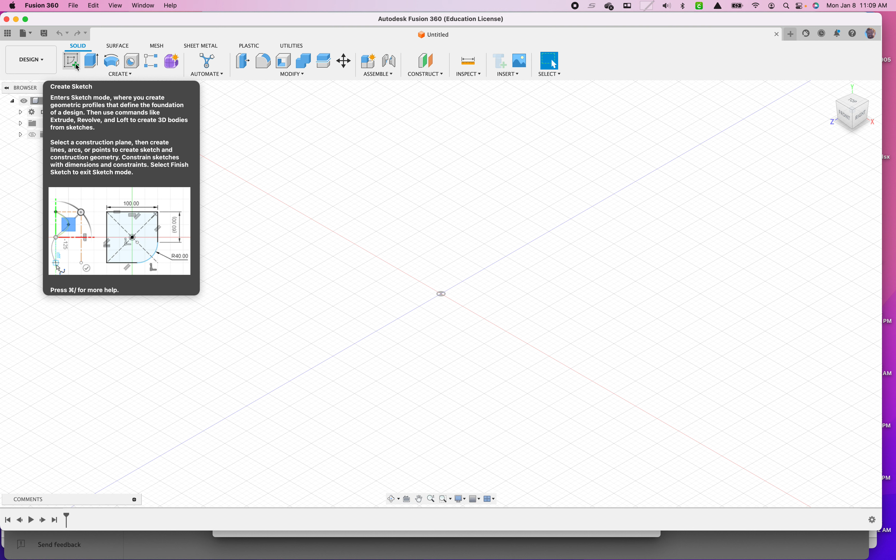This is a more advanced version of the stool design, for those ready for some new features and who've already had an introduction to Fusion 360. I'm going to design that same stool, but exactly how I should have done it for the stool we did in our shop.

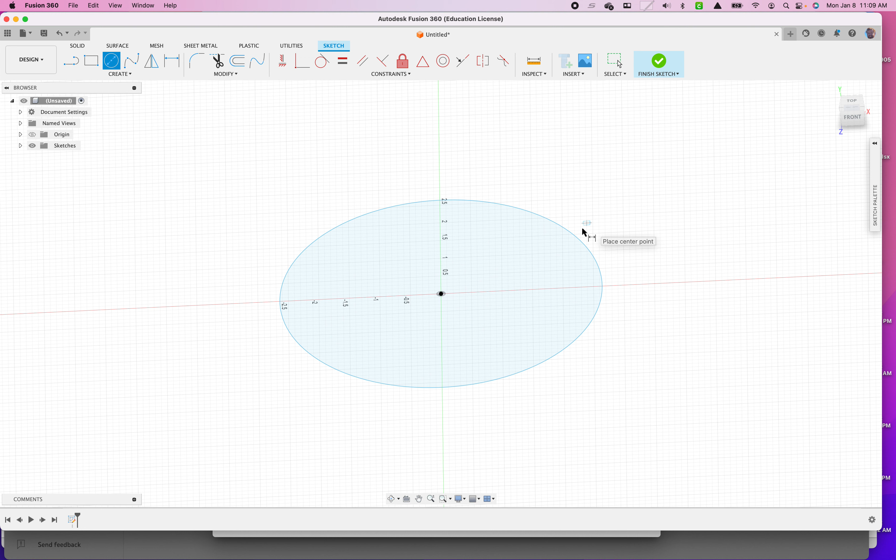I'm going to start by creating a sketch on a plane. I'll do the circle first, the seat, which gets everything oriented around the origin. I'll go D for dimension and make that circle 12 inches. Then we'll extrude it to a thickness of 0.75. All right, we've got our seat.

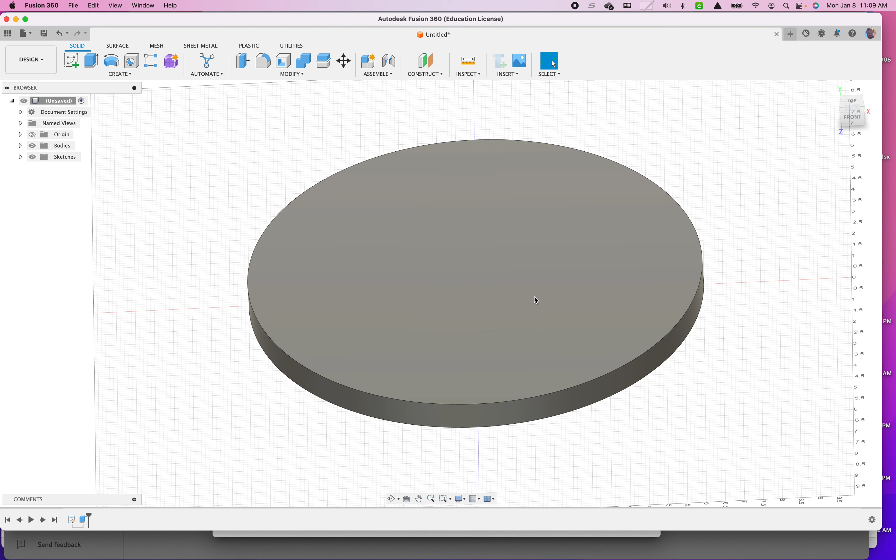Now I'm going to design our legs, starting a sketch on a vertical plane. Once in this plane, we don't have all the geometry in the right spot, so I'll include it by going to P for Project Include, click on this object, then click OK. That gives me a rectangle representing that shape. Project Include is often something you need to start with when designing from a sketch incorporating previous geometry.

Even if I were to turn off the seat, which I should label, and turn that off with the eyeball, I would still have that rectangle.

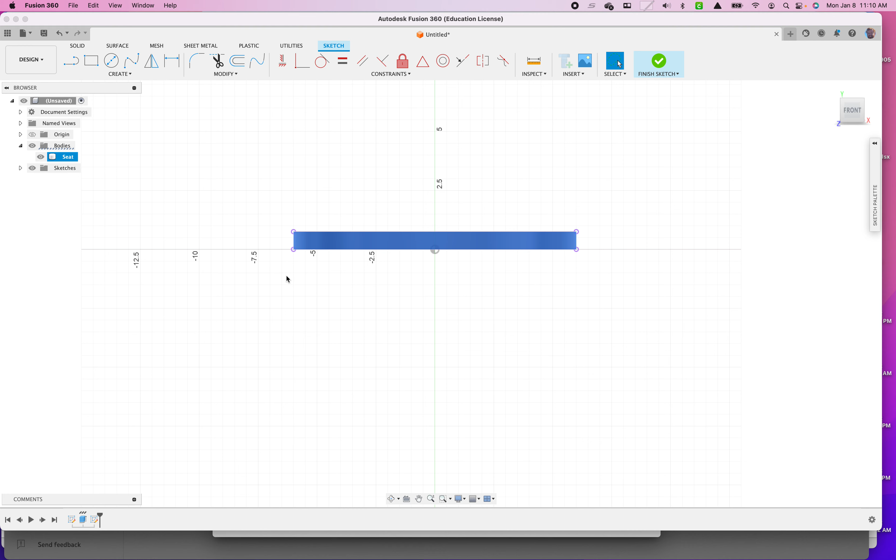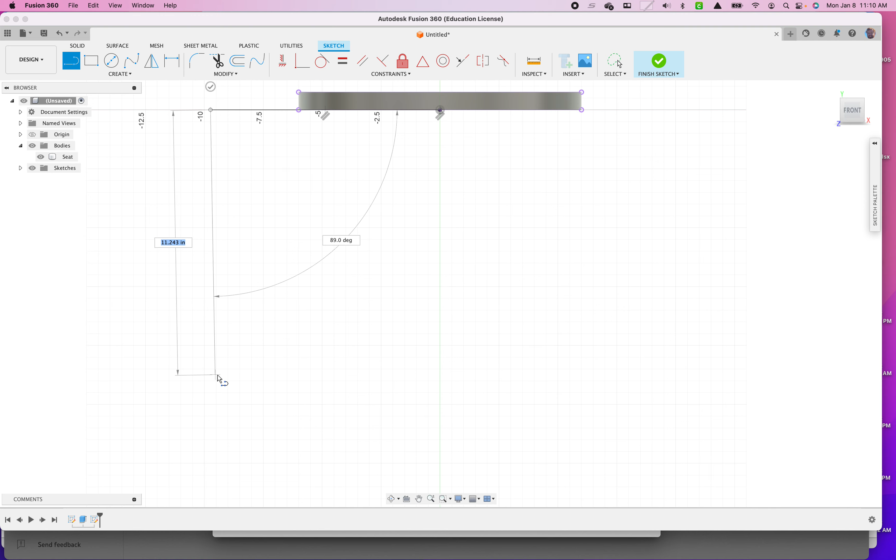Now I'm going to draw my leg structure. I'll go L for line, start from the origin, go out beyond where I need to go, then go down, straight down, doesn't matter where, then go over and up at an angle, and then flat.

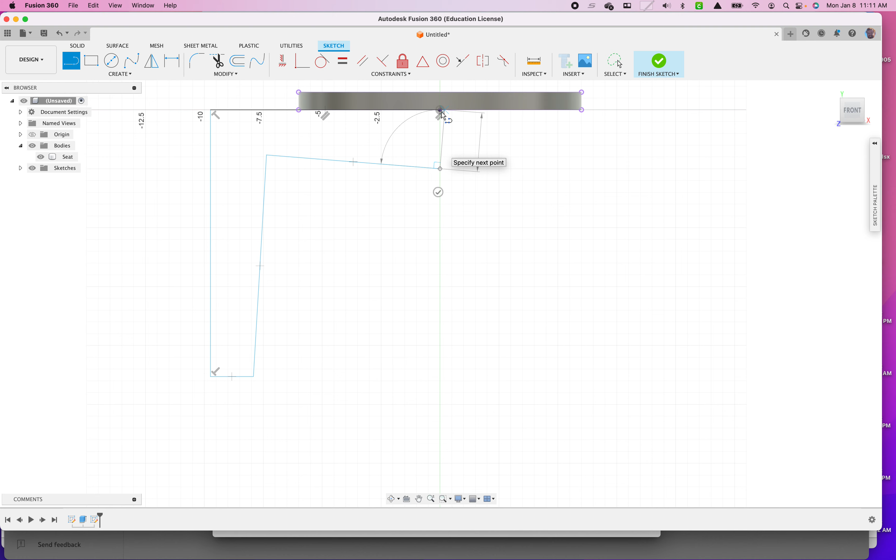I'm going to deliberately mess some stuff up so we can show some connections here, or some constraints. So I want to make this one horizontal vertical. I'll click on my horizontal vertical command and click on that line.

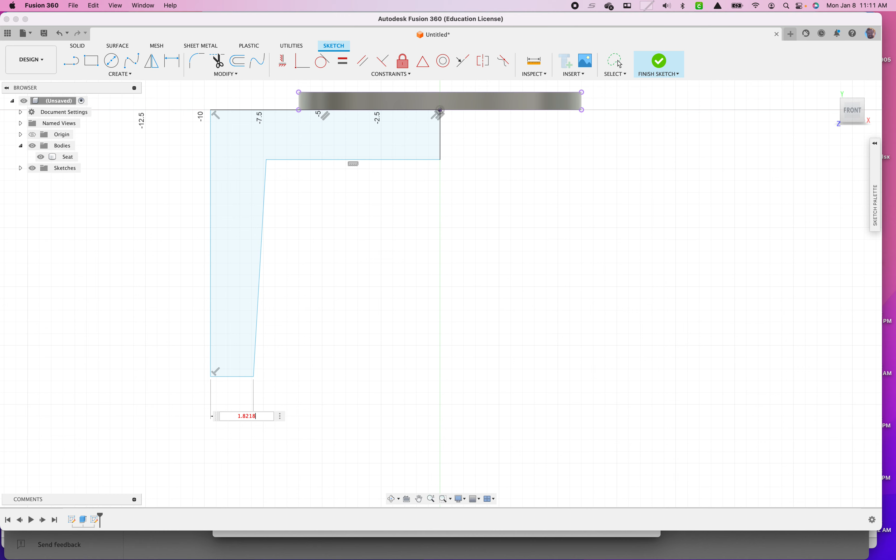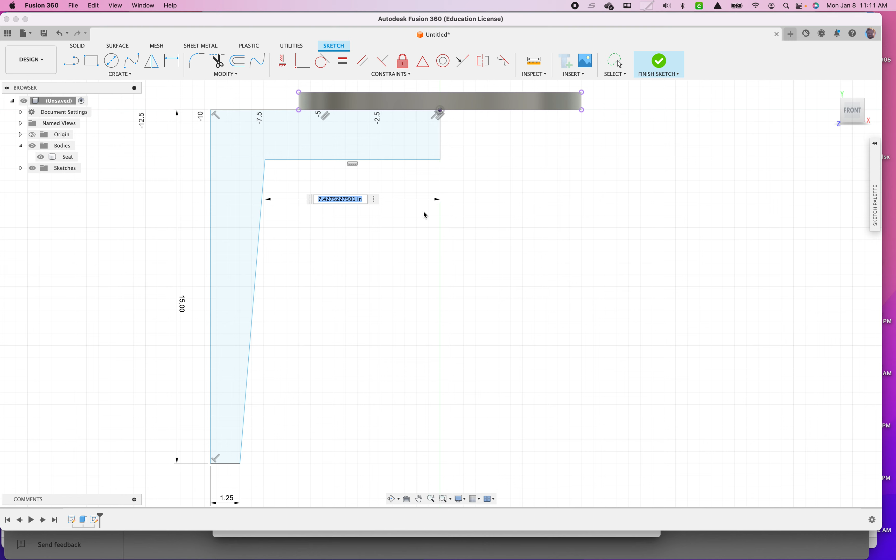Then I'm going to make this dimension here be 1.25, as I decided to do in our design. And then I'm going to make this line be 15 inches over here. Then I'll make this line just as big as my radius plus a little bit, so I'm going to go 6.25 to go just barely beyond the edge of the stool.

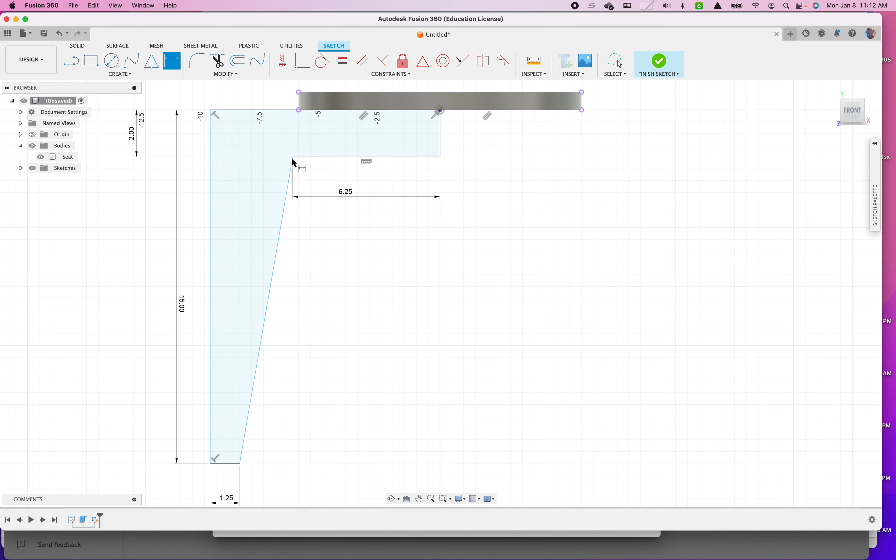And then I'm going to do this dimension here. Click, D for dimension, click, click, click, and that should be 2 inches. And then this dimension here, click, click, click, 2 inches as well.

All right, we have a line right here where we made our connection, so I'm going to make this miter cut in this piece as well. I think that's all the geometry I should add in here.

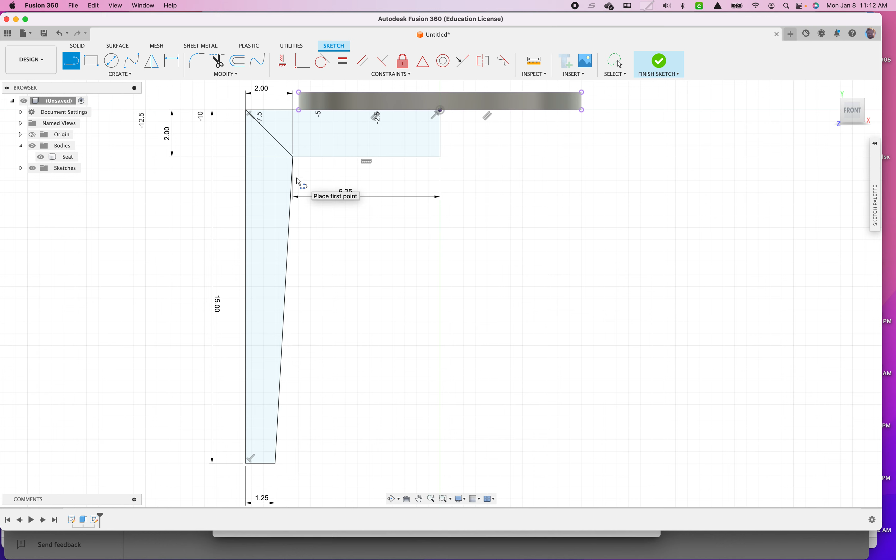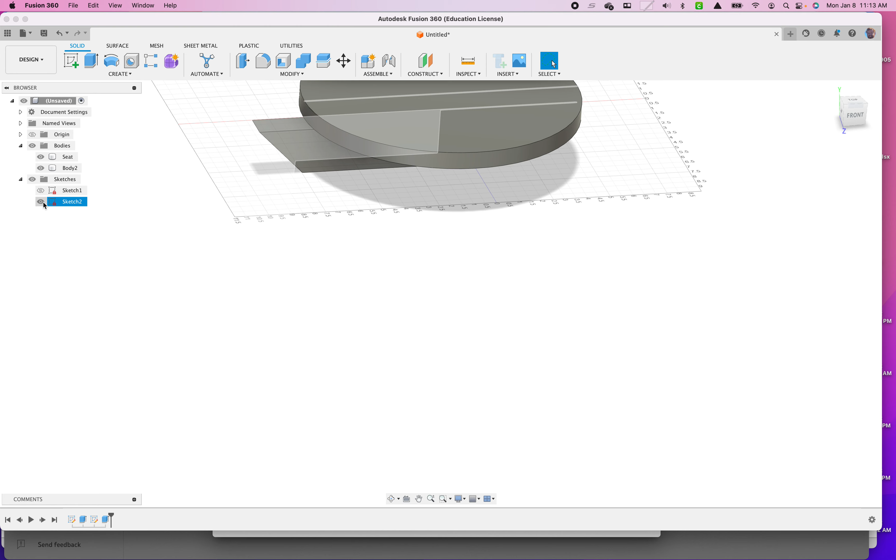Now I'm going to go E for extrude and extrude these at separate times. I'll do this one first, 1.25, not a join but a new body, OK. If I orbit a little bit, you can see my sketch turned off, so I'll go back and turn it on again. Then E for extrude, this one, 1.25, and not join, but new body as well. All right, now we've got that shape.

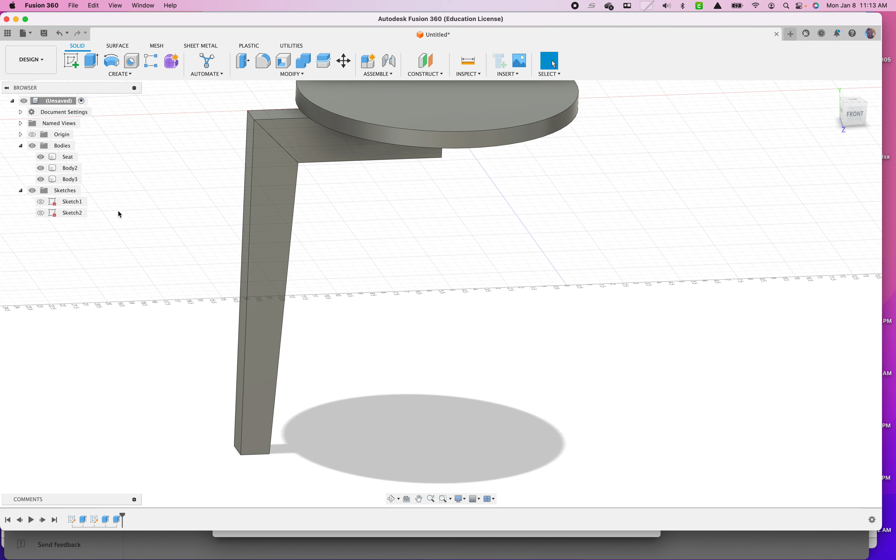I'm going to turn off that sketch now, we don't need that anymore. Next, I'm going to fix this corner up here, so I'll start a sketch on this surface right here. It doesn't really matter what you do—yeah, it should be on this surface right here. And then I'm going to turn off my seat.

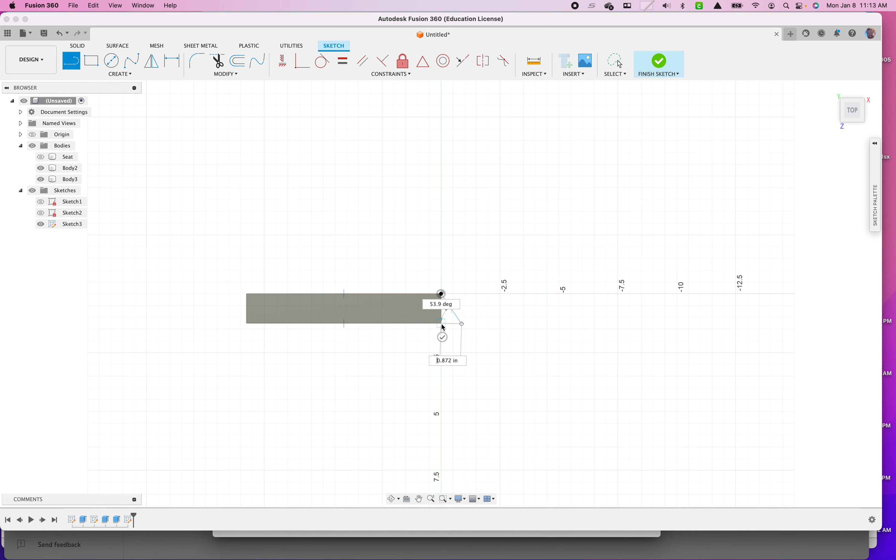This allows me to draw the angle that we're going to do when we copy this around. I might get this wrong, but we'll try the first time. L for line, and I'll draw from the origin out at a slight angle, then over to this point right here. Now I have this triangle here. I want to make sure this little line right here is horizontal vertical, and that this angle here—D for dimension, click, click.

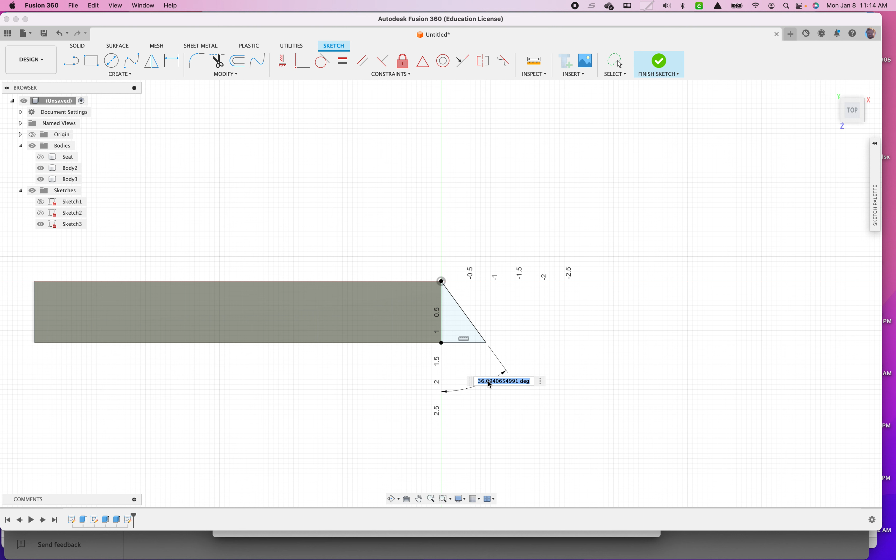This here should be 30 degrees, like so. Now I'm going to go E for extrude. I'm going to click on this guy right here, and make it... let's click on our home button again to get to a good view. I'm going to go down -2 and connect that.

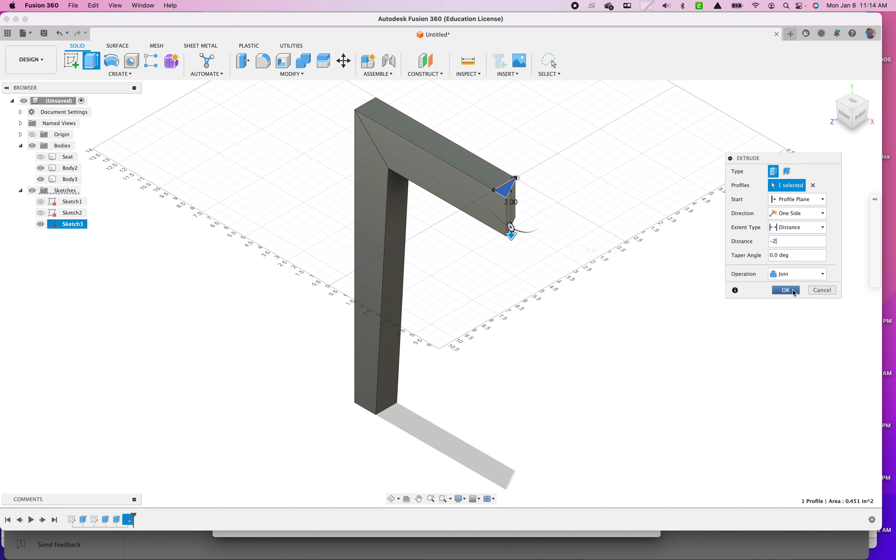Is it working? -2, and we'll do a join command, as long as it doesn't join to the seat as well, which is off right now, so it should work. So when I turn the seat back on, I have a seat up there, and I have my parts.

Now I'm going to add some of the actual joinery into this. So we cut a groove, and we put in an extra little piece here, and this is going to be helpful to put right in the middle. So I'm going to go to construct down here.

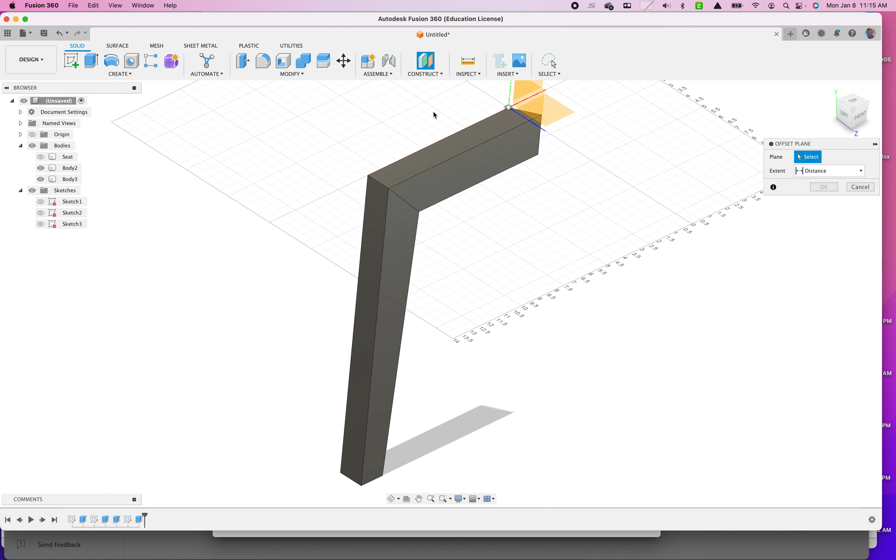The construct drop down, and do a midplane. A midplane allows me to draw between two sides of something. So I'm going to click here and orbit to the other side and click here. And now I have a plane right in the middle of those.

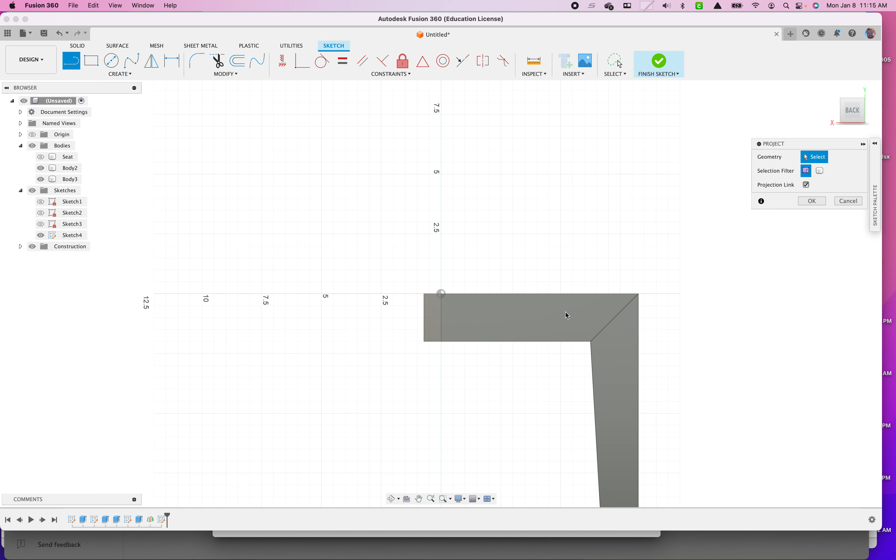Click OK. I'm going to start a sketch on that plane in the middle of my leg, and draw a triangle that represents that curve. First, I need to project include, that's create, project include, project, or shortcut P, this geometry. So I'm going to include this shape and this shape.

Now I'm going to click OK. And I'm going to do L for line, to draw from this point up here to this point down here. And this line should be equal distances on both sides. So I'm going to do a 45 degree by clicking on this and this.

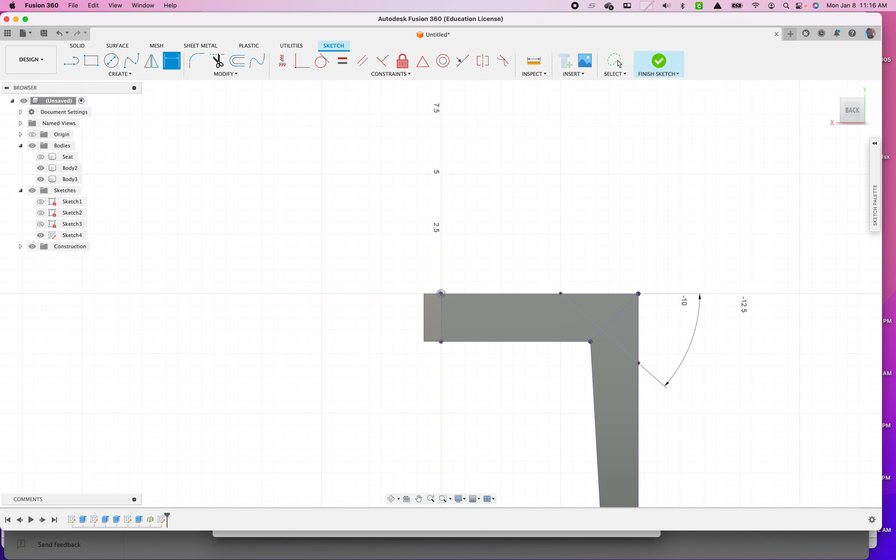Is that going to work? Yeah, this should be at 45 degrees. And then the depth of this cut, I remember, was 2¼ inches. So I'm going to click, click, click, and let's go 2.25. And enter. All right, now I'm going to create this spline in the curve by clicking Finish Sketch.

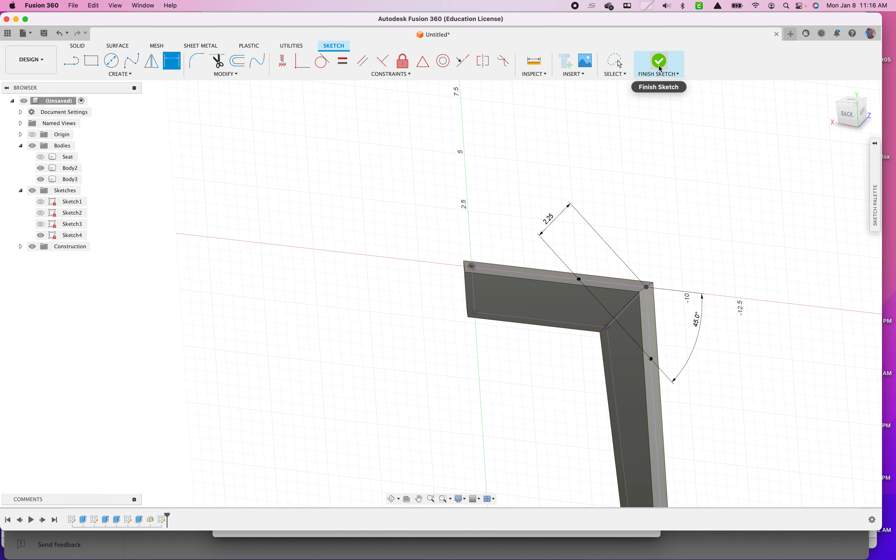I'm going to label my frame and my leg, so I know what I'm cutting, and I'm going to turn them off for a second.

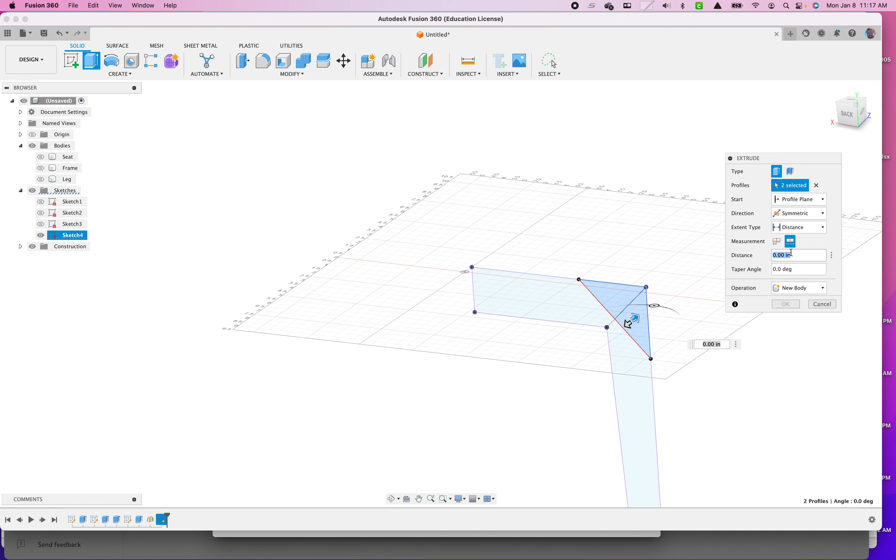And I'm going to go E for extrude, or create extrude, and click on this and this, and do a symmetric, two sides symmetric, that's just called symmetric extrusion, where the full dimension of the thing, not the half dimension, is 0.5. And I'm going to say that's a new body.

Now I'm going to turn on my leg, frame, and seat again, and I'm going to cut the hole now, because if I turn off my spline, which I should label over here, there's no hole that it's inhabiting right now. It's just part of the leg.

So I'm going to go to modify, combine, and do what's called a Boolean, where you combine things or add them together or subtract things. And I'm going to cut

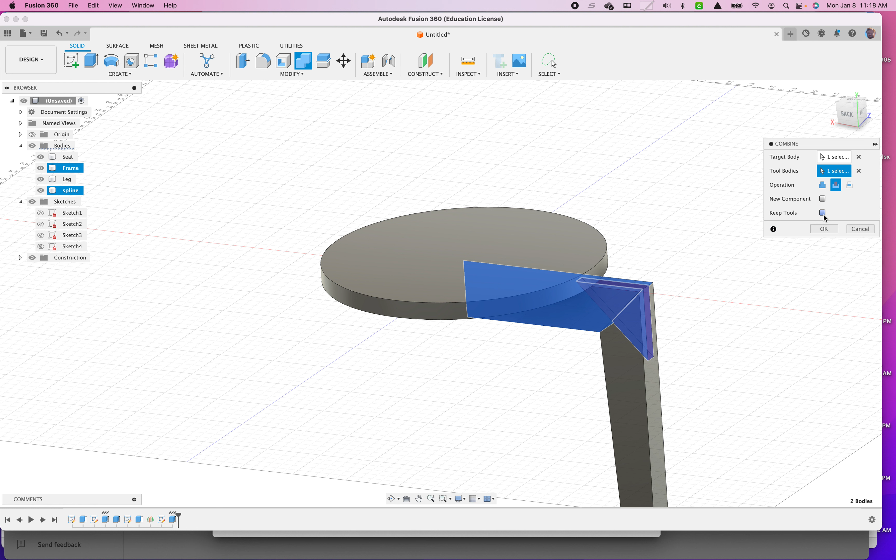this body using my spline as a tool, and you can select it over in your thing so you don't have to struggle with clicking on the right thing. And I want to keep the tool. I don't want the spline to disappear.

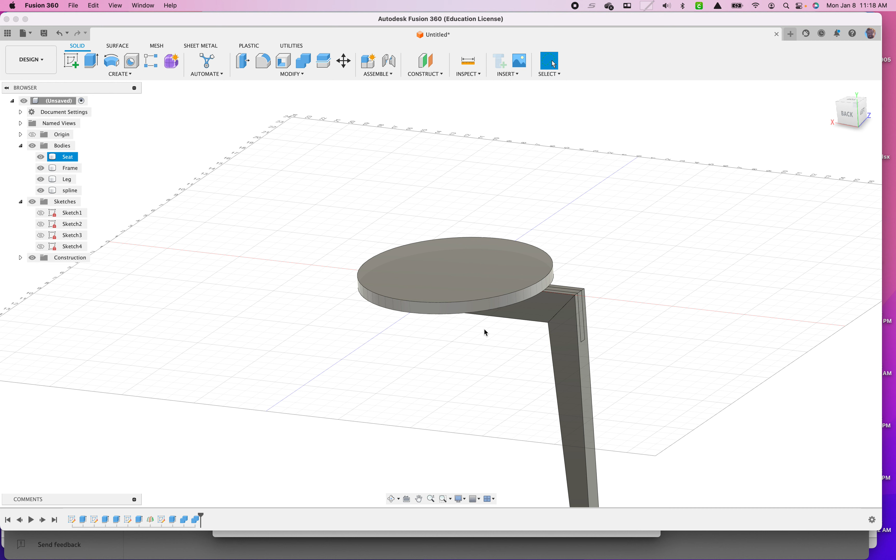And then I'm going to do that again. Combine, cut, and I'm going to cut the leg using the spline as a tool and keep the tool. And OK. All right, I think that's exactly what we actually built, as far as I can remember.

Now I'm going to turn the seat off, and I'm going to rotate around the middle, the 3 legs. So I'm going to go to create pattern, circular pattern. I'm going to copy all of these things, bodies.

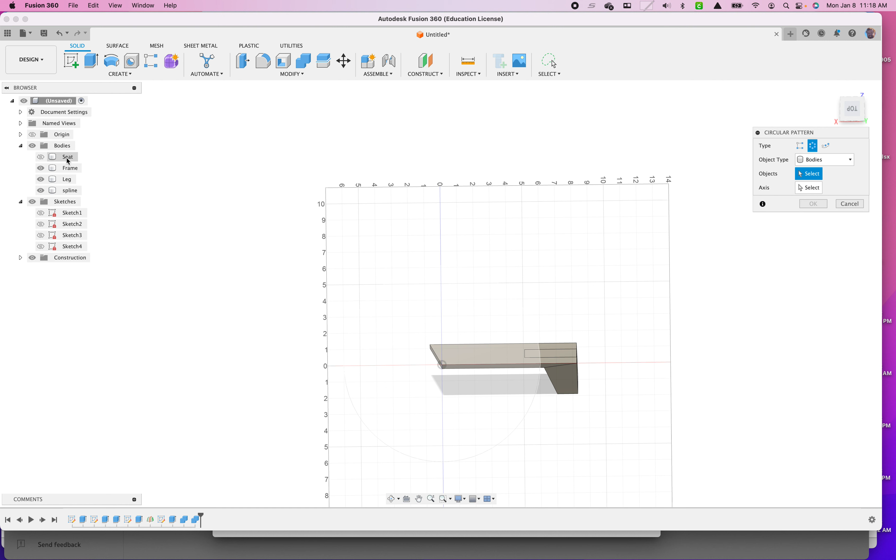Not the seat, sorry, not the seat. We don't want to select that, so I'm going to X out that one. I want the frame, the leg, and the spline to copy around an axis. And the axis I want to select is right here.

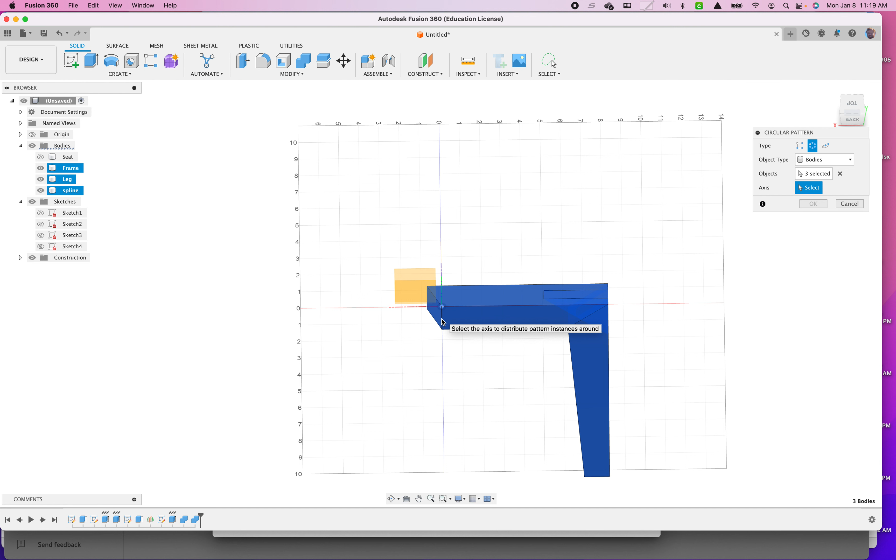Let's see how that looks. Oh, I did it right. Great, the 30 degrees was going the right direction. Okay, and we'll click OK.

Now, if you made anything incorrectly, always go back and find the feature here and right-click on the feature whenever possible to keep your design simple. Let's say I wanted to make the leg slightly taller now.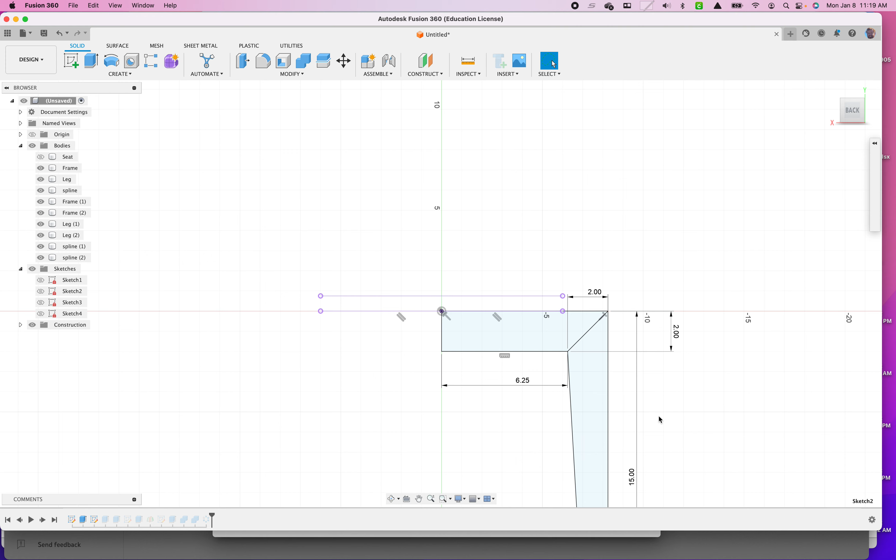Don't just add to the leg. Go back and figure out where you drew the leg, which is right here. Right-click on it, edit the sketch, and then I could change my 15 inches over here to be 15 and a half if I wanted, and it would all update.

Sometimes it creates problems, and you got to fix those problems, but it's best design practice to update your design as you go like that. All right, that didn't cause a problem this time.

Last thing I want to do is show how the seat is grooved, or how the legs are let into the seat, or grooved into the seat a little bit. So I'm going to go do two more things I want to do.

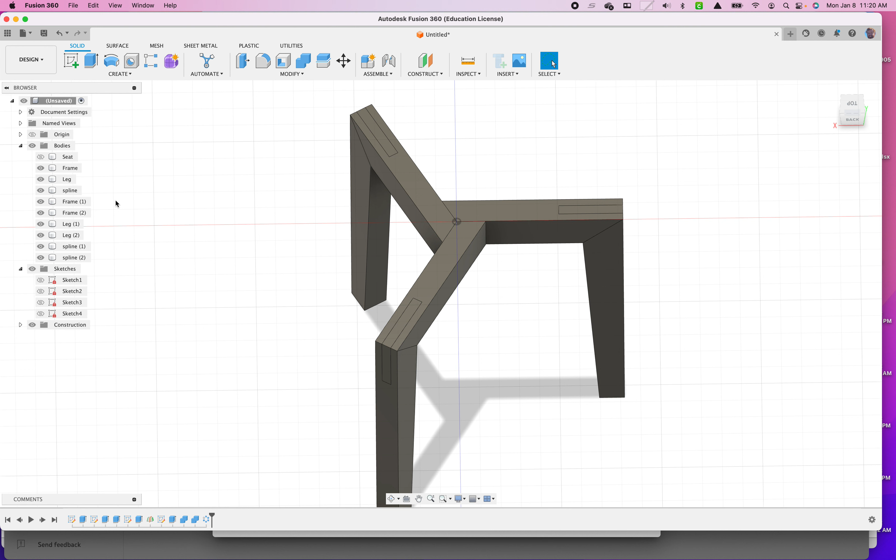I'm going to put the seat on again with the eyeball, and move the seat down a little bit where it actually would be. M for move copy. Click on the seat. I would do a translate command here to be careful and just go straight up and down.

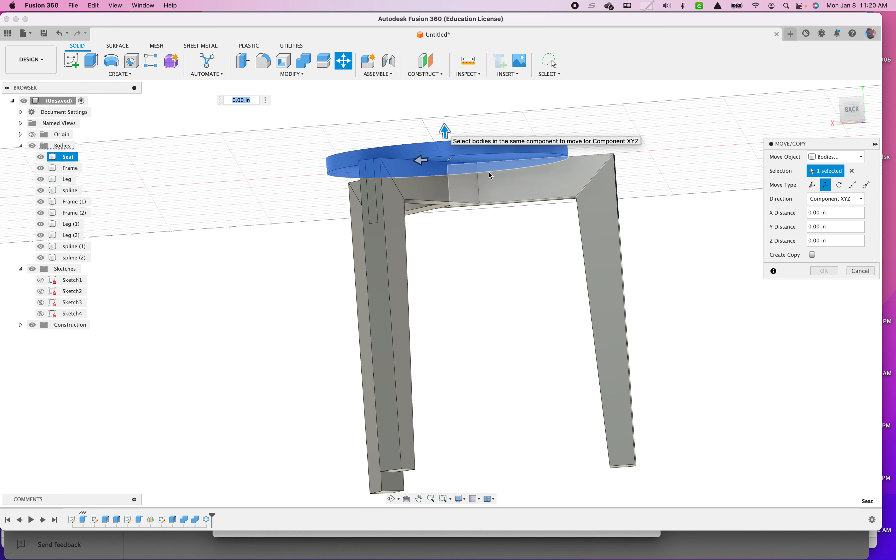Orbit so you can really tell which arrow is which. Click on the arrow and go minus 0.15, I think is what I did. And then click OK. Now, they don't have the grooves cut yet, so we're going to go to Modify, Combine.

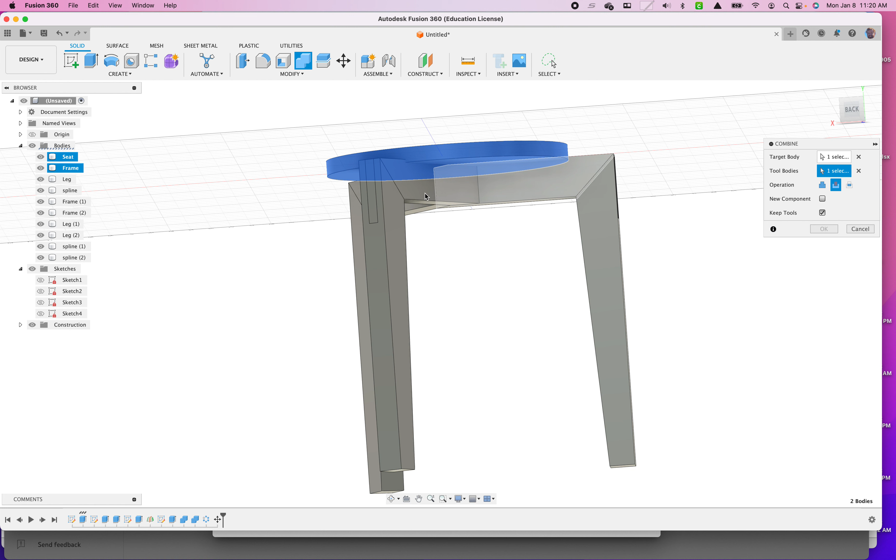And I'm going to cut this, the seat, using the frames as tools. And I'm going to keep the tools and click OK.

And now, when we turn off all these frames and all these legs and stuff, you see that there is that groove there. Ooh, I forgot to add the spline. I needed to cut with the spline as well. See how that little notch is still there?

So I'm going to turn these back on. I'm going to go back in time to what I just did. Right-click on that command, edit feature, and also select my splines. Here, spline, spline, and spline. And then that should actually cut the groove everywhere.

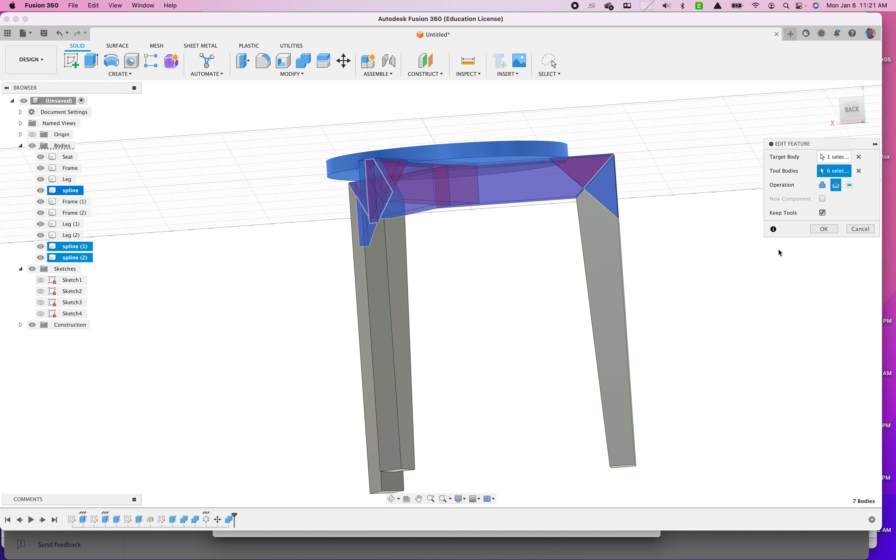Okay, so one more advanced thing that you may have learned already in my classes, or you might need to learn now, is that we need to flatten all these pieces if we want to look at them and create them. So I'm going to go to first create components from bodies.

I'm going to right-click on my bodies command, create components from bodies. Now they all show up down here.

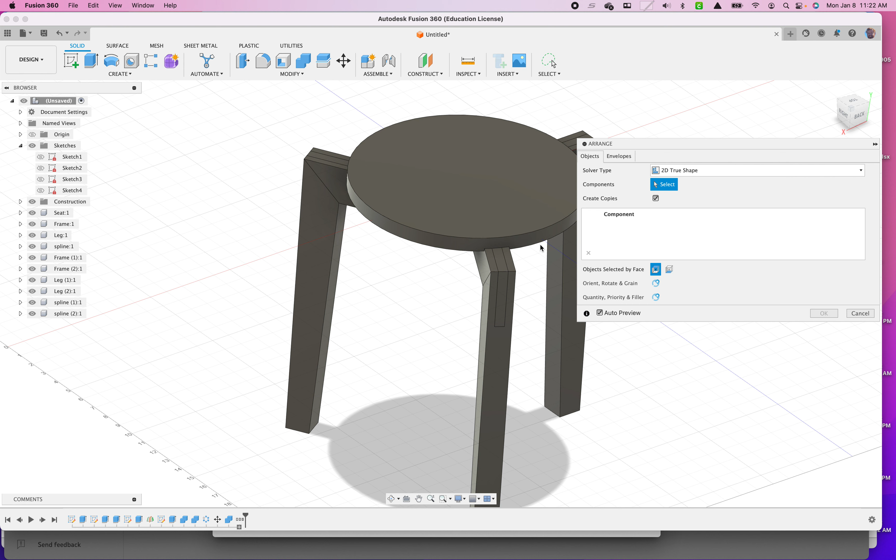And now I'm going to lay them flat by going to Modify and Arrange. I'm going to arrange all my parts as if I were to manufacture them. I'm going to put the seat facing upside down so I can see the interesting stuff on the bottom. So that one goes that way.

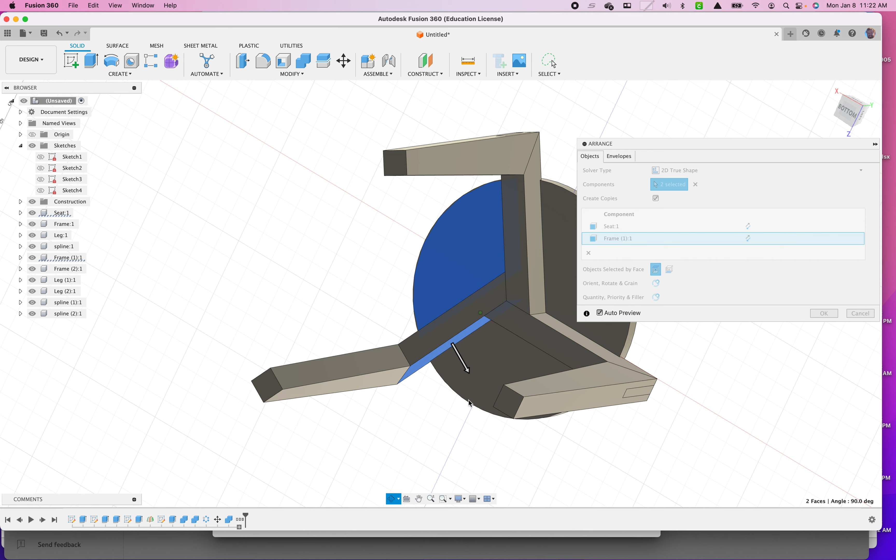This one I want to have the angle facing up, so I'm going to select here, and then this angle, I'm going to do this one facing up. And then I'm going to do this one facing up. And then it doesn't really matter where my legs are facing, so I'm going to do 1,

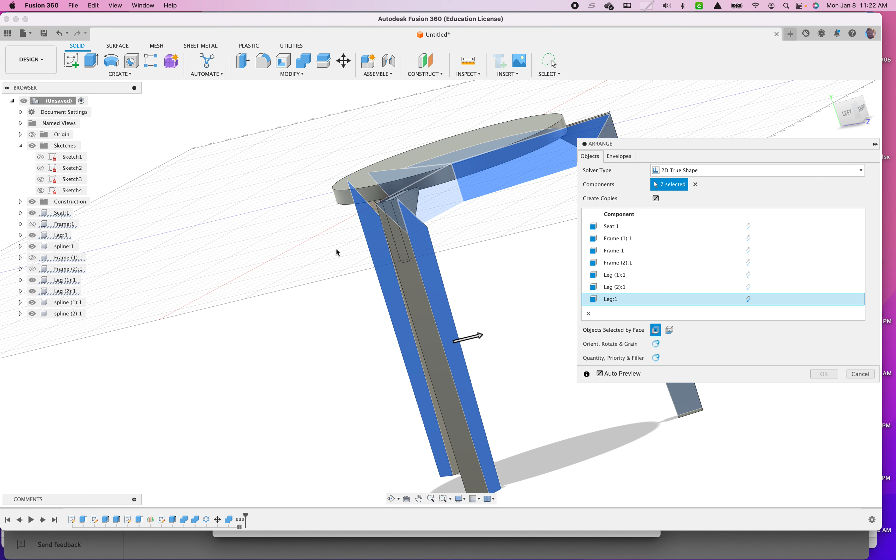2, 3. And then if I wanted to put my splines in there too, I would probably turn off my frames for a second. Frame 1, frame 2, and frame 3. And then I can select the splines there too.

1, 2. Oops, did I get the wrong thing there? I think that was right. We'll see. And then this one here, 3.

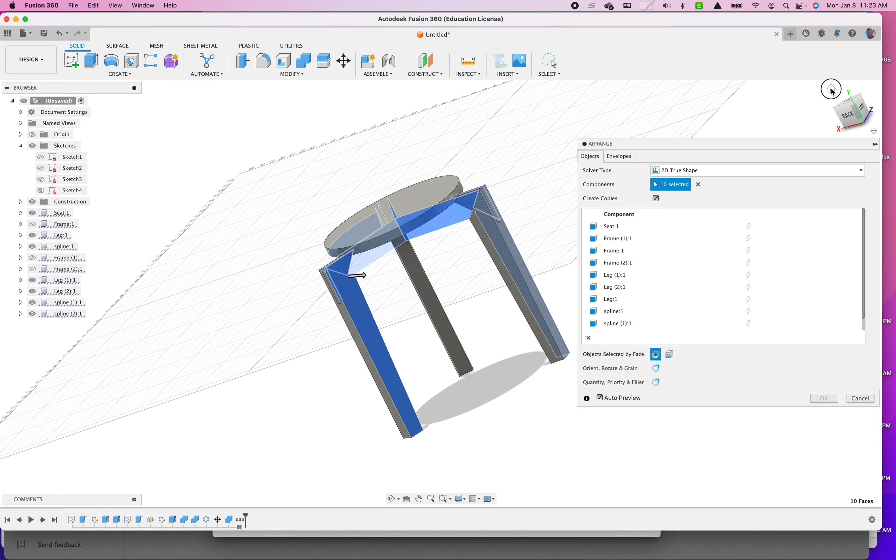Okay, now I can fix that in a second because right now I'm going to go back to my home view and I'm going to select my envelope. Envelope is going to be on this plane right here, and I'm going to give myself a length

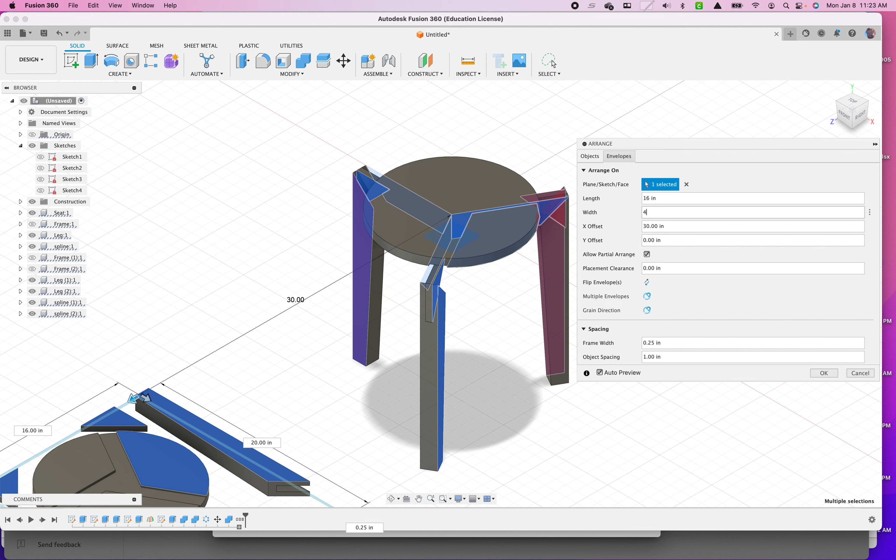of 10, or a length of, sorry, need at least 17 probably, or 16, and then I need a width of, let's try 48. And let's see if all those fit in that space.

We're missing our frames. Oh, right, because they're not on right now. 1, 2, 3. Okay, looks like we can fit these a little bit tighter, so I'm going to give it a little less room and try 30.

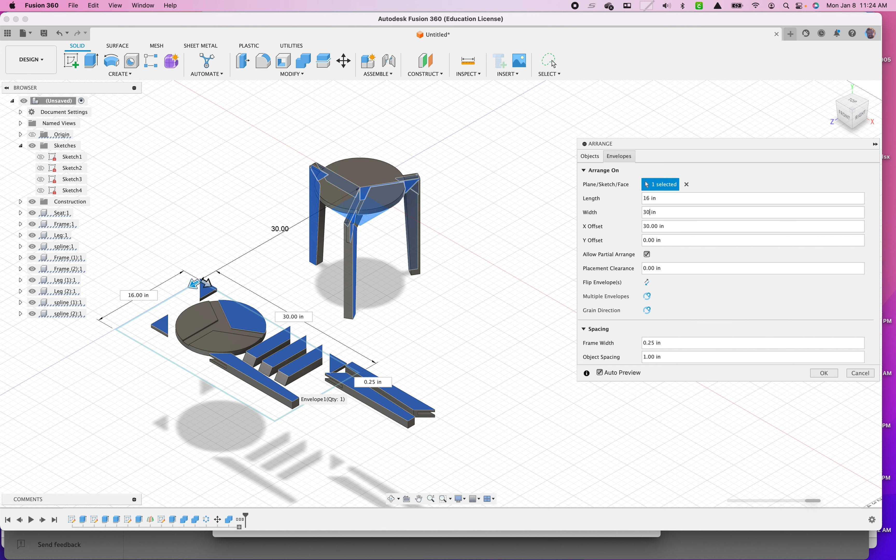And that looks much better. Looks like a nice design in there. And I have an object spacing of 1 inch, that's for CNC manufacturing. And I have a 1/4 inch for the frame width, which you could change as well.